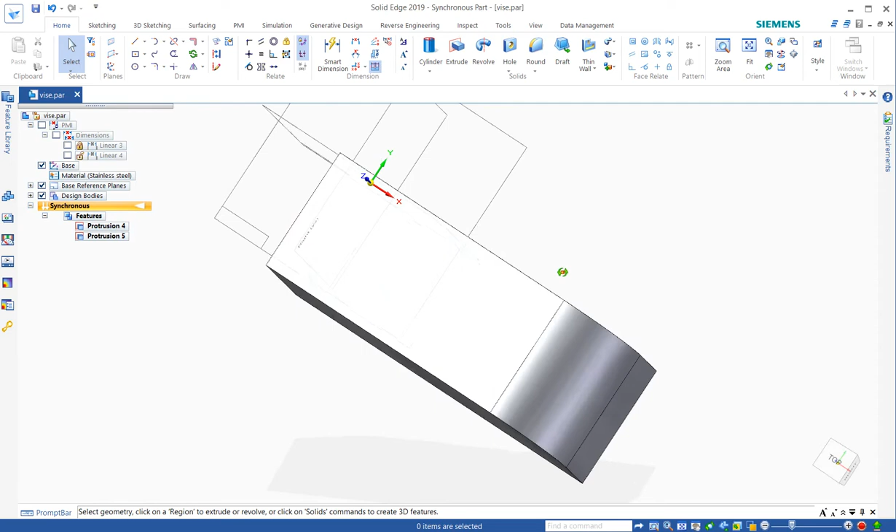This next activity, we're going to remove some material from our vise project. The first thing I'd like to have you notice is the activity in the book is a little flawed in my opinion, because they're having you model and they're not asking you to maintain kind of the symmetry about the base coordinate systems. There's many reasons you really want to do this.

So to move an entire part onto the base coordinate system, you simply hover with your select tool and wait for the dots. Choose the entire design body and then position your steering wheel strategically. In this case, I'm going to put it onto the midpoint of that edge, and I'm just going to move the entire body.

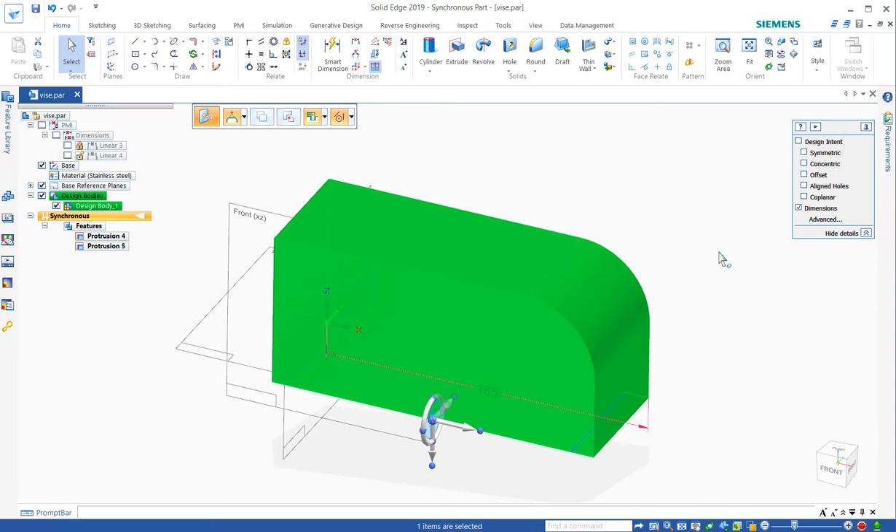Now we'll cover the design intent panel later. For now, because we're moving the entire part, we don't really need any of those settings, and they may in fact prevent a move in some cases. So that will move it first in the X direction, and you see the steering wheel stays in place, and then I'll move it over to the midpoint here and move it in the other direction.

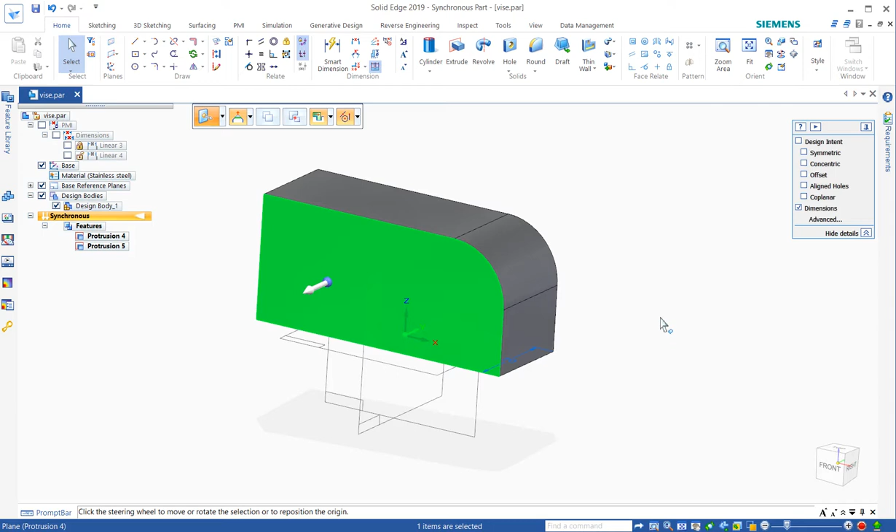So now the design has symmetry in it, so that means now when I make edits and when I put my design intent on, I just tapped R on the keyboard, by the way. It turned all my design intent back on. It sees the symmetry in the design, and all is well. So let's continue with the activity.

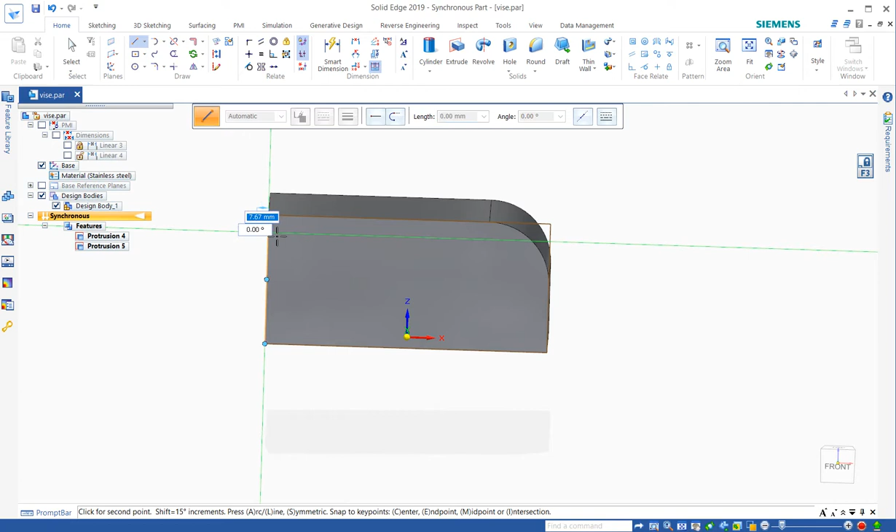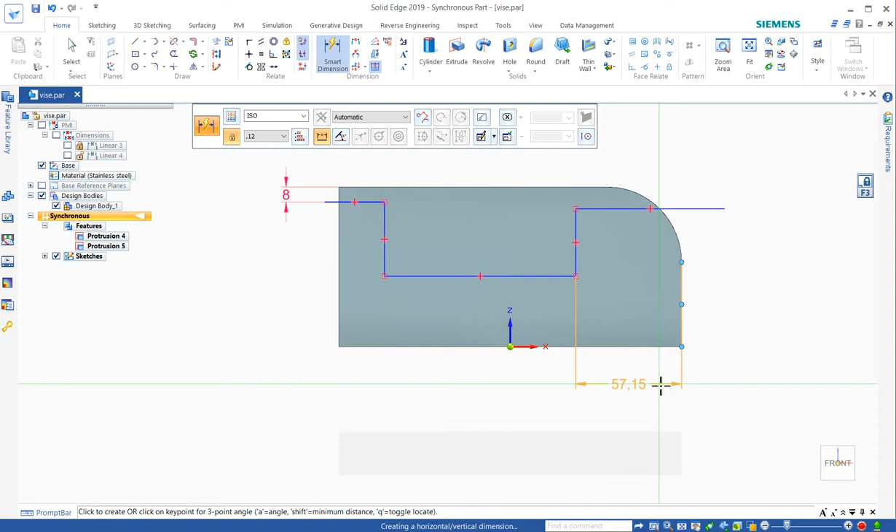Line command. I'm going to draw my favorite way, which is visually approximate, and then accurately based on the numbers that I have. So I grab my smart dimension, use my Control H, kind of prefer to look squarely at the top. This is 8. Actually, we don't have a dimension on that side, we have one from this side. This is 32.

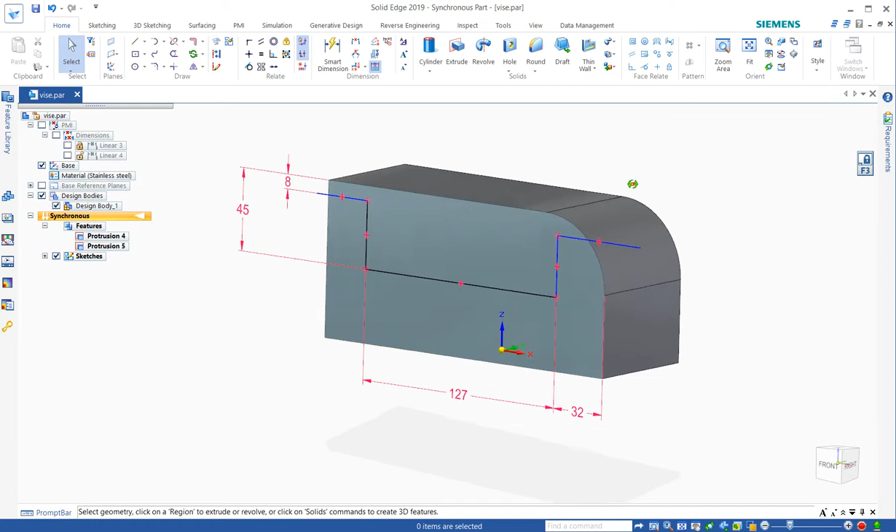The overall width is 127. And 45. Just based on the drawing that I'm looking at. So again, this does form a nice region, so you can simply select that region.

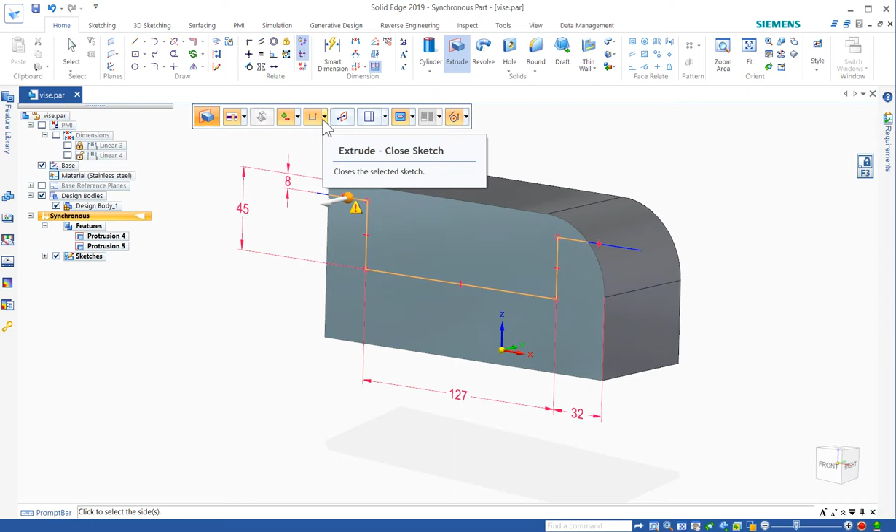They want to point out there are different extent options here that you can take advantage of. Finite is based on a number, through all will go all the way. In this case, we could probably use that, and you just make sure you point the arrow in a direction that it solves. And at some point you really want to observe some of the other options here. We'll cover a little bit as we go, but that's given me the solution that I want, so that looks pretty good.

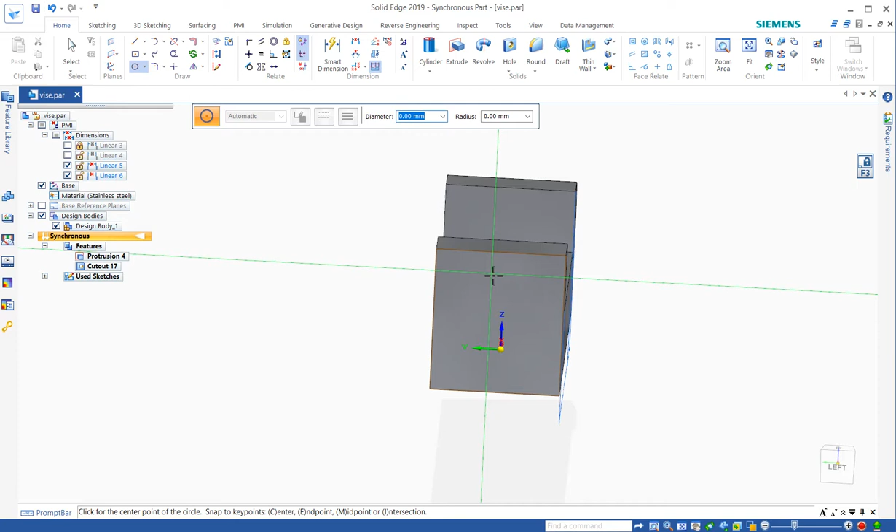Let's see, moving on, we're going to draw a little circle on one end. You'll see the reason for this. Again, locking. I like my Control H. I'm going to pick up this midpoint.

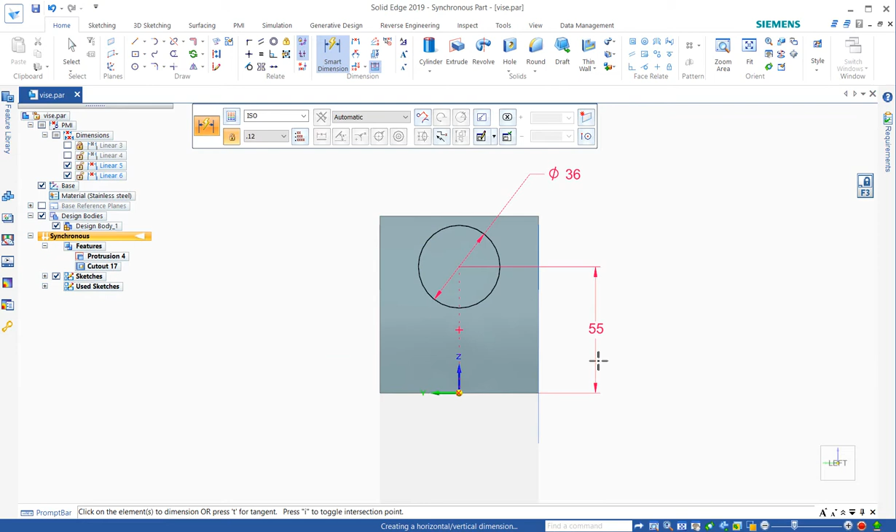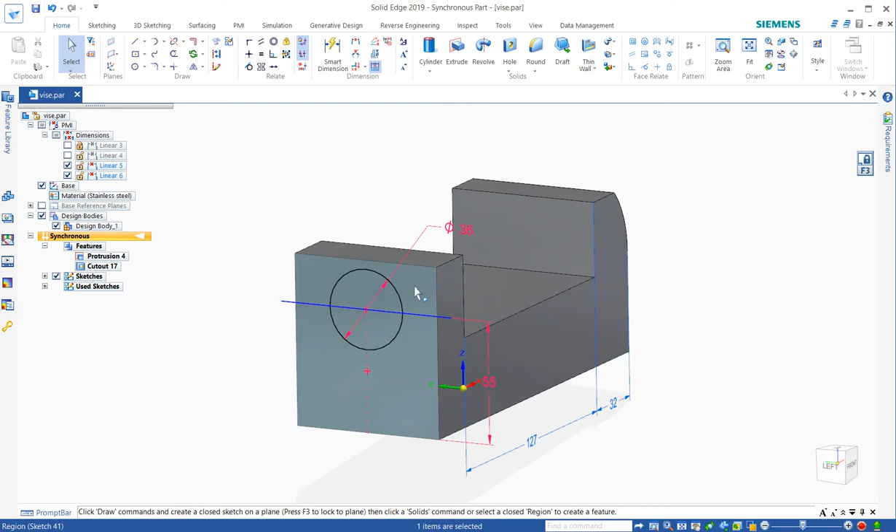And one of the amazing things about synchronous modeling is, notice I'm working what seems to be a little sloppy. I'm not trimming my elements. It's because I know all I really need here is a region to remove that material. And I'm going to go ahead and hide my sketch. So any remaining sketch that didn't get completely consumed for that cut, it will leave it there. Once the sketch is consumed, it moves it into the used sketches bin, just in case you needed to restore that at some time in the future.

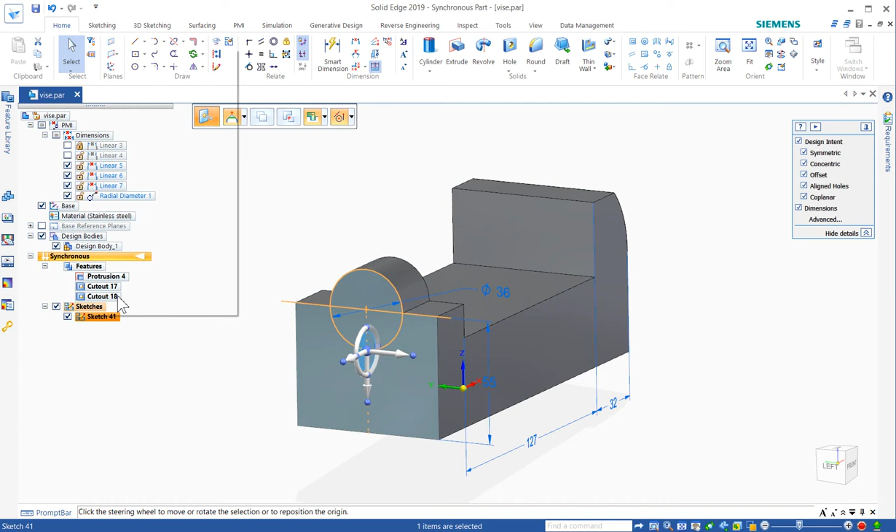But you could actually just delete that if you wanted to. Even this sketch here, if you found it annoying and you didn't think there was another use for it, you could just delete it. There's no need to keep that around. We'll go ahead and put a little hole for the through hole, I guess. Probably would use the hole command normally, but I'm just kind of working to the book. It's not too bad.

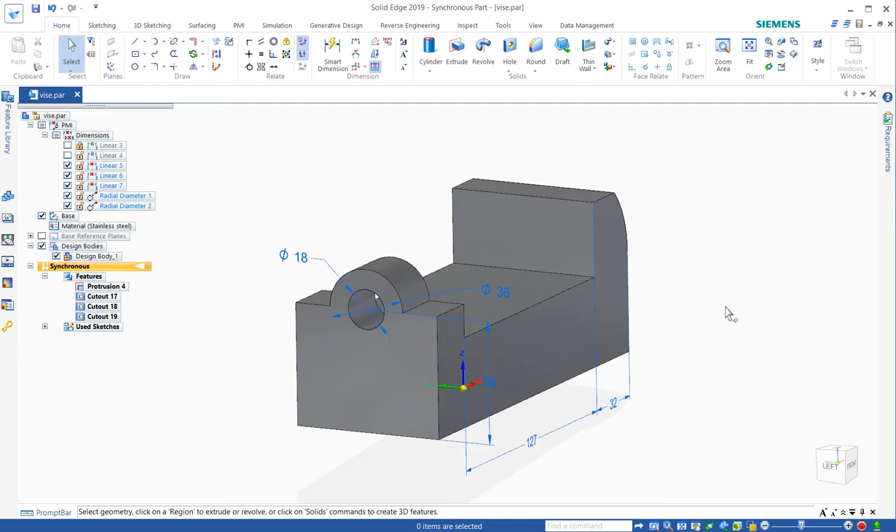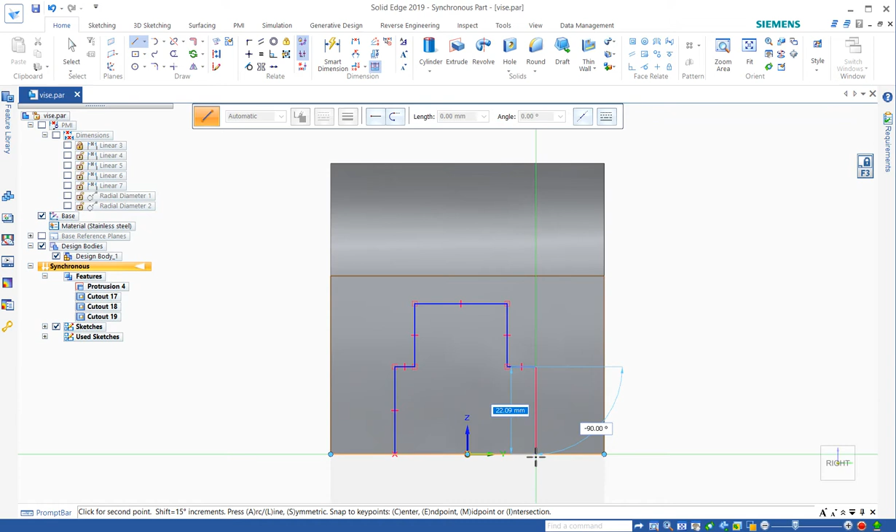Next we're going to make a little slot for the bottom, and at any point come up here and just hide all your PMI if you want to clean up the screen. Grab your line drawing command, lock to a face, Control H, and I'm going to use my favorite workflow and just kind of eyeball this, keep it roughly what I want, and then I'm going to go and constrain it.

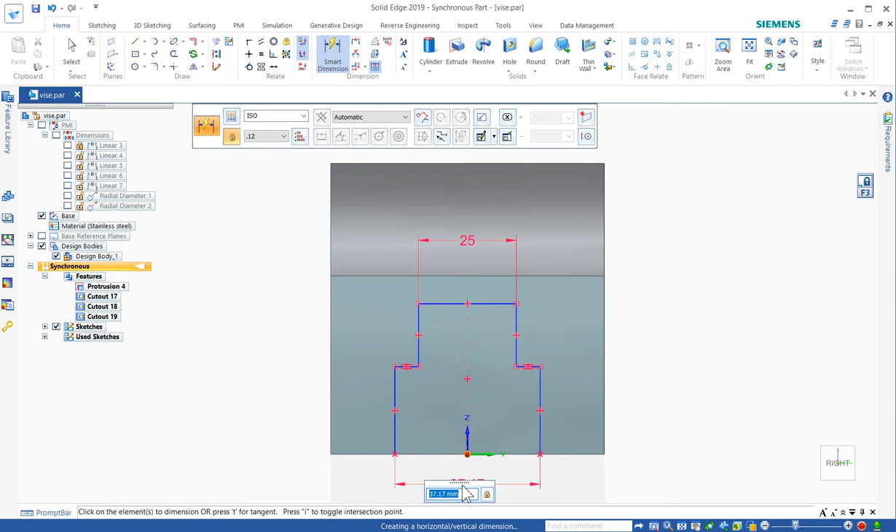I know these need to be equal, and horizontal vertical relationship, I'll hover and get the tool tip on that maybe. This is a great way to line up, say, a key point to a midpoint. And now we can apply dimensions. Looks like we have a 25 and a 32. And a height of 27. And an overall of 43.

I could do equals or collinear, but I think equals is pretty good for these two. So there we go, simple sketch. I think that looks correct. If it's not...

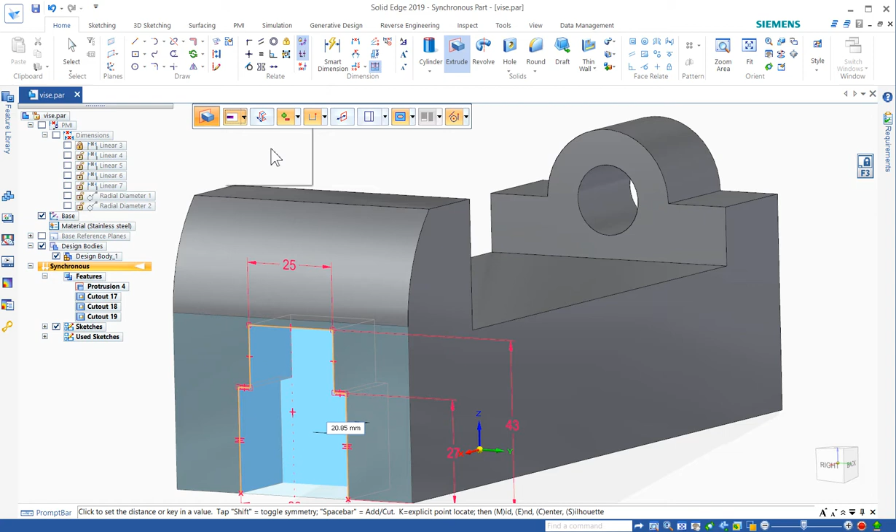Now I'm going to blast this through. Again, you can just make sure you plow it all the way through, or if you really want to feel like you're doing it correctly, you can do through all.

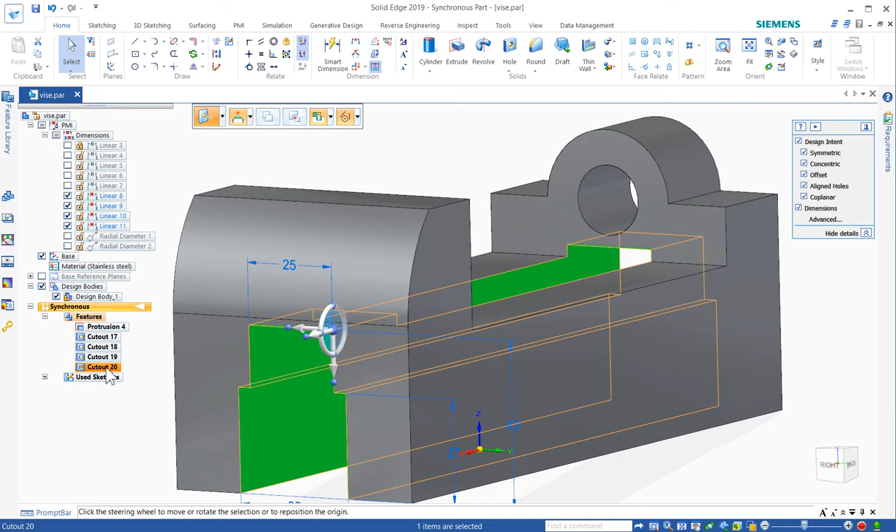Now these make a lot more sense, or they're actually retained in ordered modeling. The through all, through next, and from-to steps are retained, but in synchronous modeling they're more of a convenience, because when you go back to this cutout and try to edit it, you won't ever get those parameters back. If you needed to change the depth, you would simply model in.

You'd restore the sketch and kind of plug up some remaining area. So it's just because there's no history. Works very well, actually.

And now I think we need maybe a couple of holes. I don't really see the details, but I'll pop those in. Just some arbitrary holes.

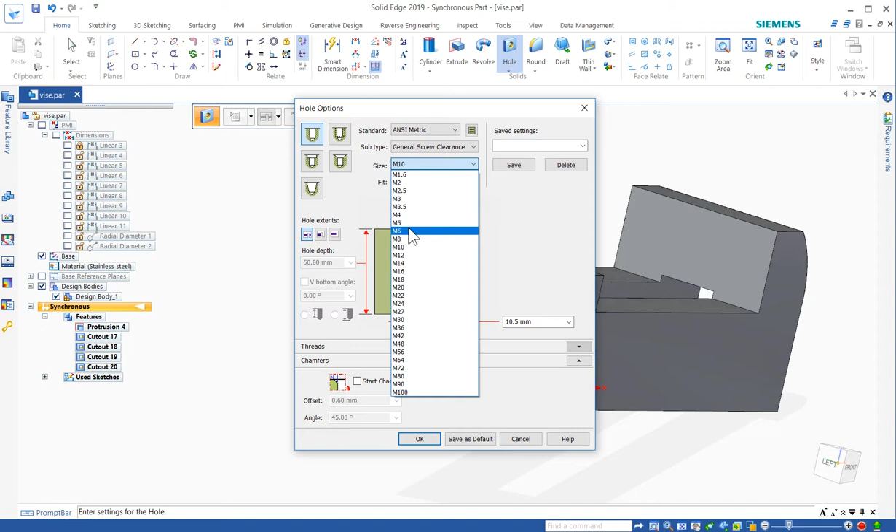The hole command is very standards based. We'll do like an M6 threaded hole, as if we were going to have a screw maybe and a fixed vise.

So I'm going to hit F3 to lock. I might come over here and pick up that midpoint, and then brush the previous hole.

And sometimes people ask, what if I needed these centralized? Well, you could do a couple things. You could draw a sketch prior, or actually I would probably just use my smart dimension and think about the order that you place the dimension.

So notice I click the hole second, and that means that the hole moves when I change the dimension. So edge first, hole second, place my dimension, and of course there's other ways that we could do that.

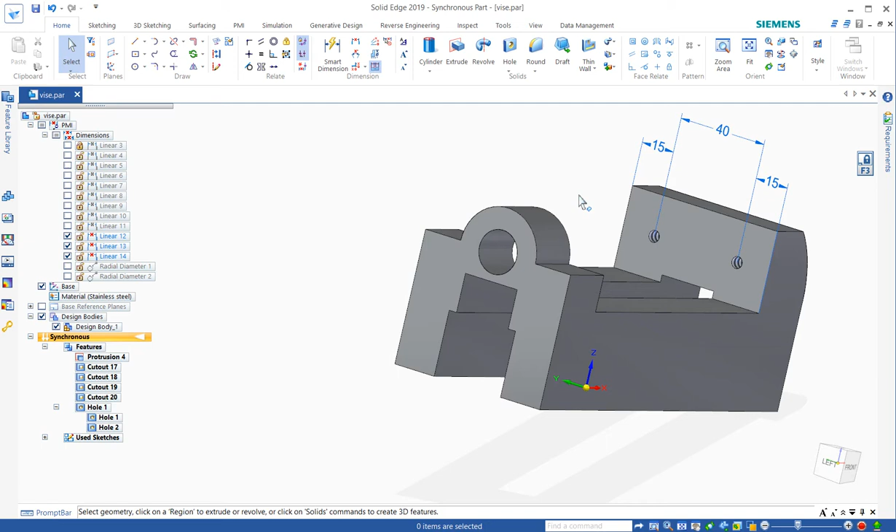And then if I put one in between, this would be 30. We could actually change that equal space now because of the way the dimension allows me to change in a symmetrical manner. Make that maybe 40. So there's certainly a couple of ways to control that.

And now we'll add some little feet to the base. I'm going to grab the line command. Now sometimes you will be locked on a previous plane. You want to unlock and then relock.

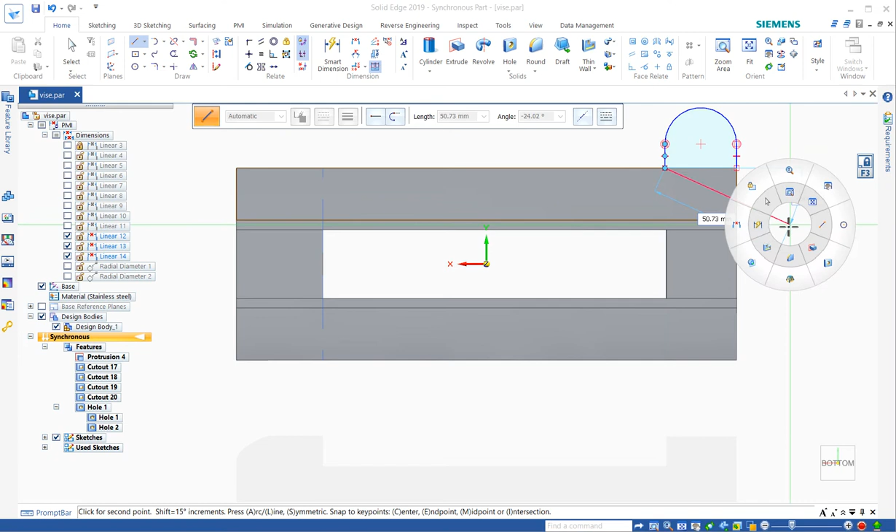And I'm just going to click on the end, tap my A, come around, close it, go right to dimensioning. That's a 14 and a 10.

And then we can extrude this. What did they want? 3 millimeters. Actually, it should be thicker than that. Let's do 10.

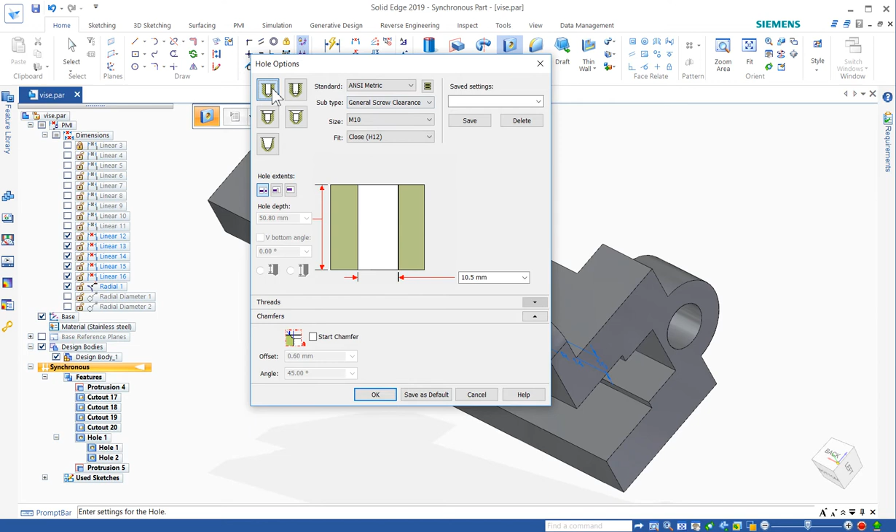So that's 1 foot. Maybe I'll go ahead and put a hole. Maybe just a simple hole. M10.

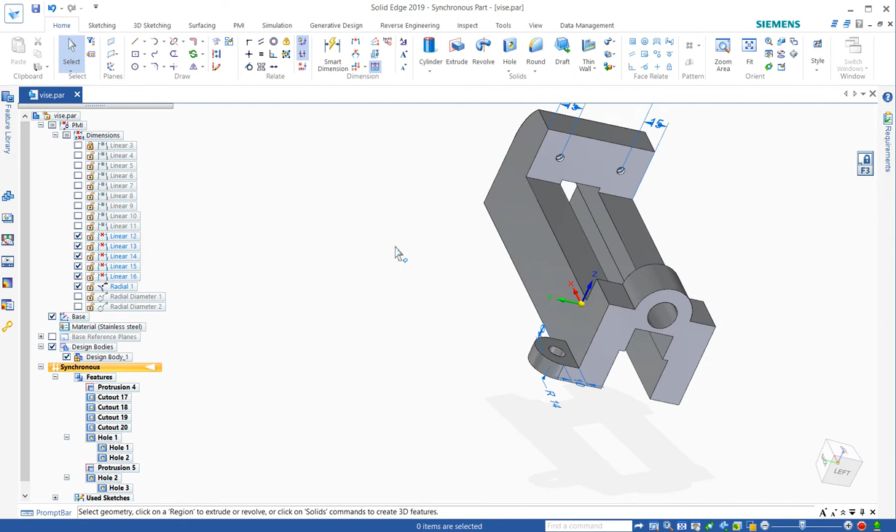I'm going to lock with the F3. Touch that circle, should pick up the center. And then we need more feet.

Now, the way they have you do it in the book was probably a little different. I would probably mirror these. You could make copies pretty easily. There's a couple of things you could do.

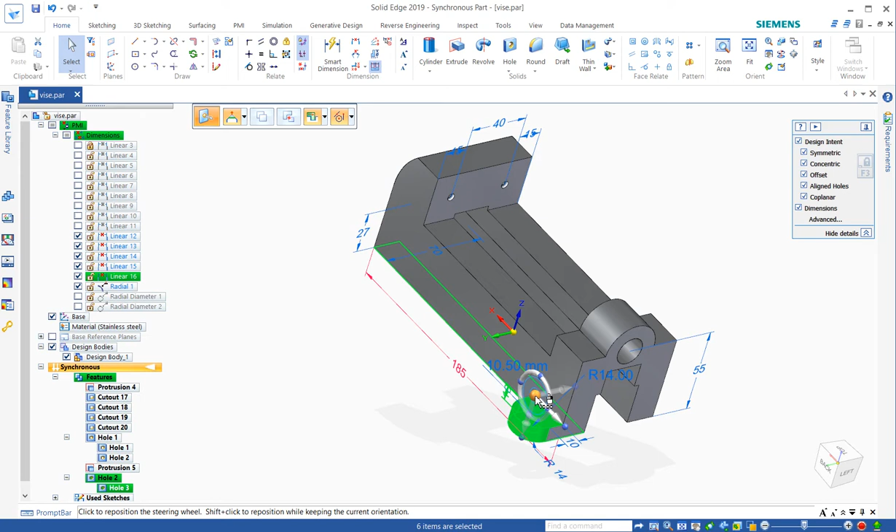You could just pick the geometry. Make sure you pick enough. You probably need to tap spacebar and grab this bottom and put the steering wheel at this leading edge, and I'm going to hold my control key down, or I could press this button in just before I touch the arrow, and then we're going to move that down to that corner. And you see I didn't get enough geometry.

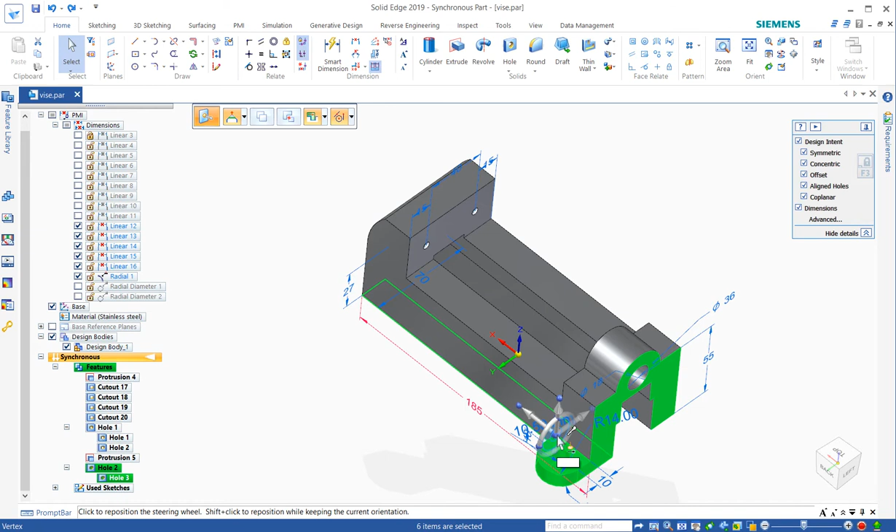I needed that end cap, so I'm just going to undo that, grab this again, spacebar, end cap, bottom, place this at that corner, control key down, arrow, destination, bang, I got a foot.

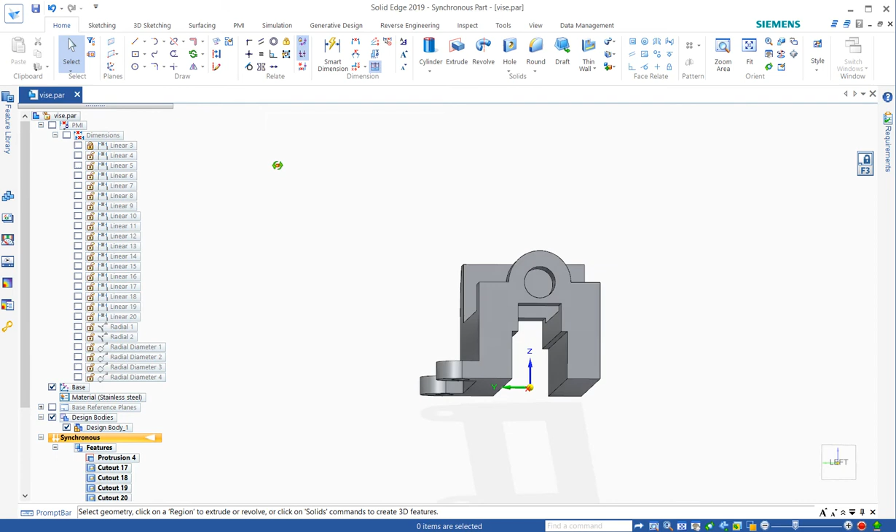So that's one way to do that. You just need to pick enough faces so that it can re-fuse itself onto the other side, is kind of the way to think of it. It's kind of like building a concrete form. You need to make sure you have enough sides to hold the concrete.

And if you wanted to do a mirror, you could do that as well. Again, you'd want to make sure you pick enough geometry, so you'd pick the feet and the bottom. In this case, I'd probably even need the ends. It seems probably a little funny. It will trim away the extra geometry that it doesn't actually need.